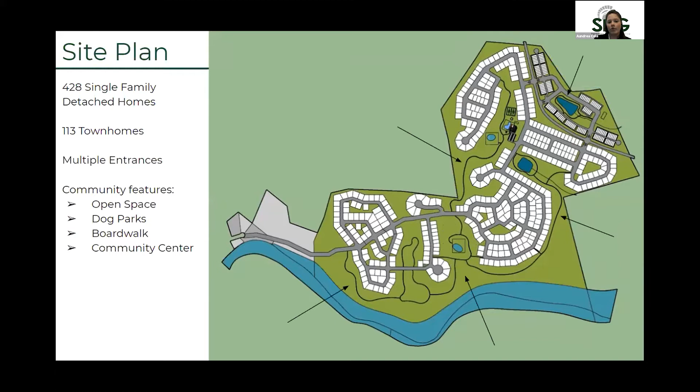Some community features of our design are open space, 3 dog parks, a boardwalk throughout the open space, as well as a centrally located community center.

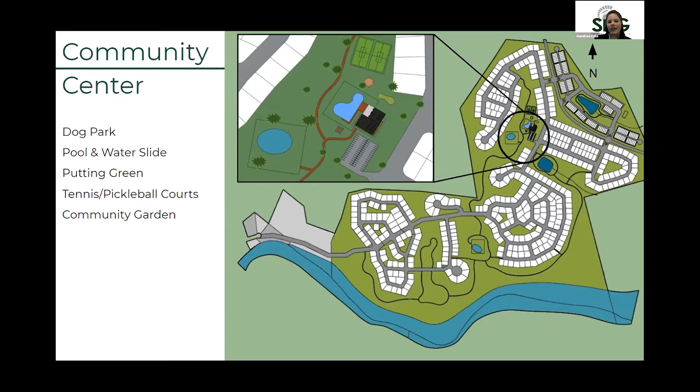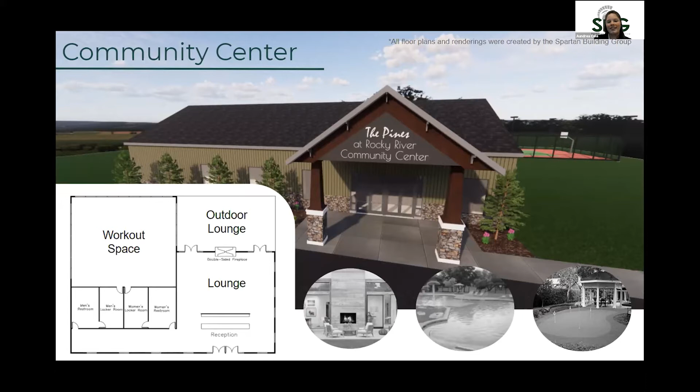This community center is going to have one of the dog parks nearby, a pool and water slide, putting green, tennis and pickleball courts, as well as a community garden, so there's something for everyone at the Pines at Rocky River. The community center is also going to have a workout space with men's and women's locker rooms, an outdoor and indoor lounge that's connected by a double-sided fireplace to create a cozy atmosphere that can be used year-round.

Our standard lot is going to be 80 feet wide by 100 feet deep. This allows for all of our floor plans to be set on most of our lots. It's important to note that there are 63 lots that are 60 feet wide, and this still allows for 5 out of 6 of our floor plans to rest on those locations.

Pink indicates any lot that has direct access to open space. Orange indicates any lot that's 9,000 square feet or greater, and yellow indicates any lot that has direct access to open space as well as a larger lot.

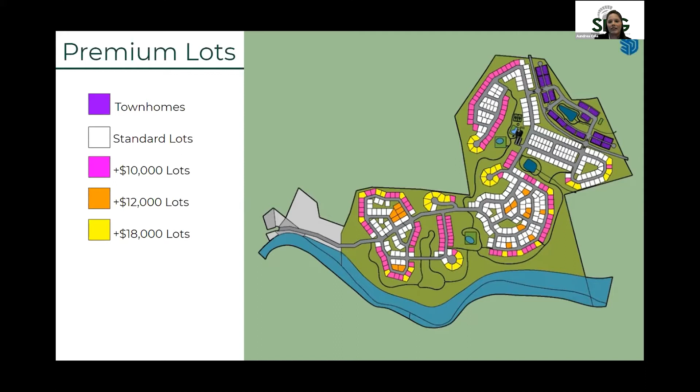Sustainability is very important to us at Spartan Building Group. We were able to achieve a 4-star National Green Building Standard rating for this site design, as well as an emerald rating for lot design. This was mostly due to following the natural topography of the site and creating a curvilinear road design.

Along the road network is our rain gardens, which is our main stormwater management system. These features, as well as the open space and a low impact option for our boardwalk, allowed us to create a beautiful and sustainable neighborhood for our residents.

Now I'd like to pass it on to Taylor for product design.

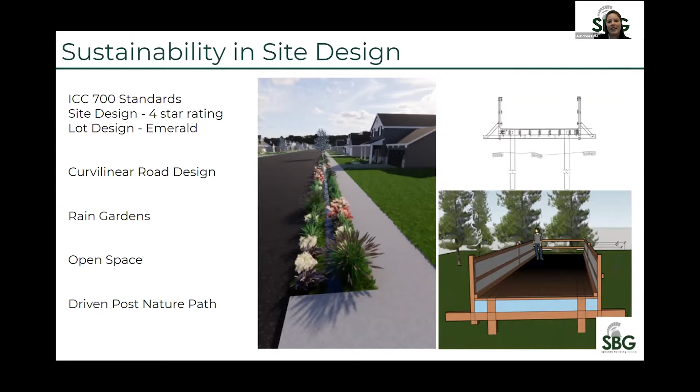Thanks, Andrea. Here at the Pines, we offer 6 unique single-family home plans and 4 townhome plans to choose from. All these models come in a craftsman-style exterior and are equipped with a 2-car garage, a covered porch, and a back patio. All our models are 0-step entry homes to allow for ADA accessibility and comfortable aging in place. The homes are customizable with our unique finished packages, and buyers have the option to choose from multiple upgrades.

First up, we have the Hickory. At approximately 1,300 square feet and a starting price of $264,000, Hickory is our most efficient model. The single-story home is an affordable option for first-time home buyers all the way to the active adults who are looking for less square footage to maintain.

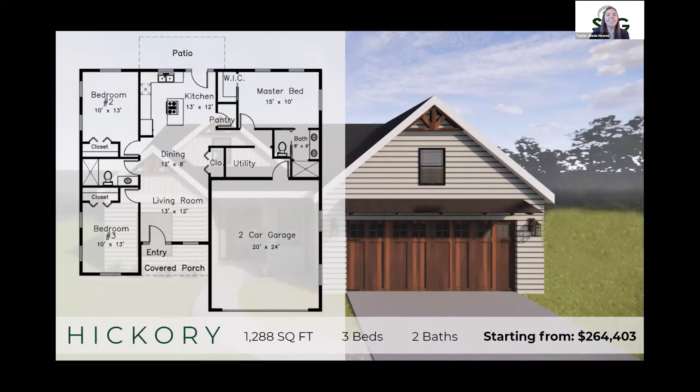Next up, we have the Cypress. At approximately 1,600 square feet and a starting price of $294,000, the Cypress is our most efficient 2-story model and offers a pocket office space, making it ideal for the young professionals who are moving to our area.

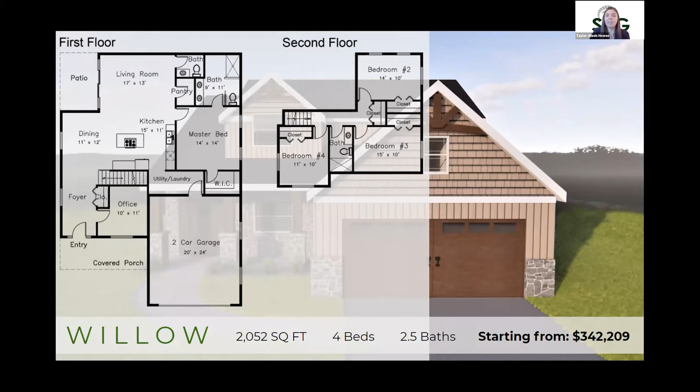Now showing is the Willow. At approximately 2,000 square feet and a starting price of $342,000, the Willow's additional square footage allows for a first-floor master suite and private office. This model is ideal for buyers who desire the large common spaces but appreciate the privacy as well.

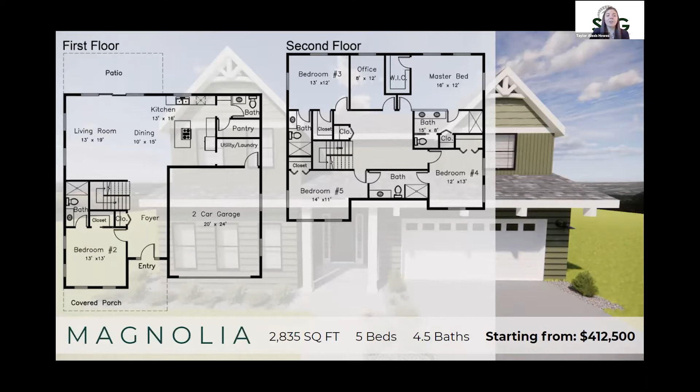Next up is the Magnolia. At approximately 2,800 square feet and a starting price of $412,000, the spacious common area and large number of bedrooms, coupled with the fact that the first floor bedroom can act as an in-law suite, make this model ideal for large families. And finally, we have our Dogwood.

At approximately 3,300 square feet and a starting price of $448,000, the Dogwood is our largest model, allowing features like additional flex space on the second level and a breakfast nook off the kitchen. The spacious bedrooms and first floor master suite allow this model to fit a multitude of lifestyles, from active adults to large families.

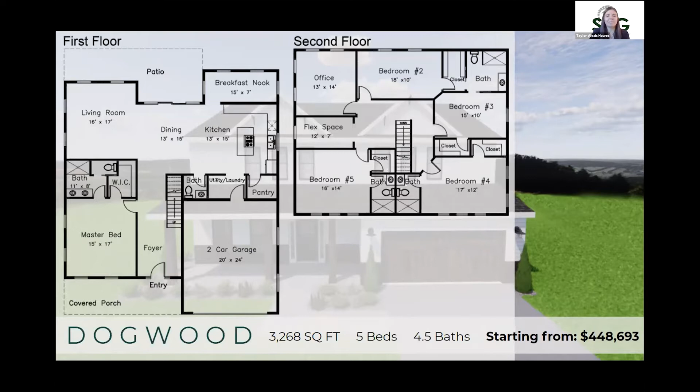Here at the Pines, we also offer 4 20-foot wide townhome plans, 2 of which are interior unit designs starting at $291,000 and 2 of which are end unit designs starting at $306,000. All these units are 3 stories tall and have 3 bedrooms, 2 full bathrooms, and 2 half baths, allowing for at least 1 bathroom per level.

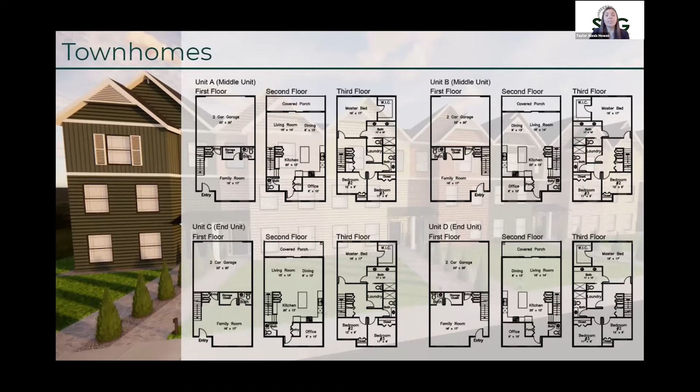Additionally, they're all equipped with a 2-car attached rear-loaded garage, a 2nd-story covered porch, and the upgrade option to include a shaftless elevator if the buyers desire. These are ideal for buyers who are looking for a low-maintenance home but don't want to compromise on size or style. Sustainability is also a very important part of product design here at the Pines.

All our models are equipped with low E windows, low VOC paints, and smart thermostats. Our standard appliances are all Energy Star rated, and all our fixtures are low flow.

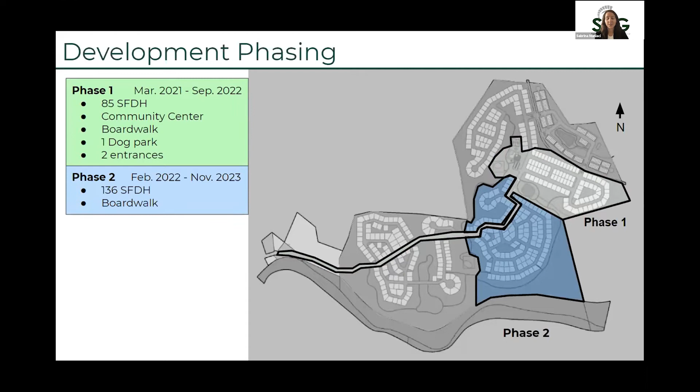We've structured our base schedule on breaking ground on 3 homes per week in accordance with our projected market. The first of 4 phases will incorporate 85 homes in the northeast, south of Zion Church Road, and the community center. Each phase will begin when its preceding phase is 65% complete, so phase 2 will start February 11th, 2022, and includes 136 homes in the middle of the site and along the Rocky River.

Phase 3 will start March 13th, 2023, and includes 122 homes in the westernmost area, as well as the entire 113-unit townhome area northeast of Zion. Finally, phase 4 will start June 11th, 2024, and finish out the remaining 85 homes in the northern area of our site. The entire project will finish in 4 years and 9 months, completing December 4th, 2025.

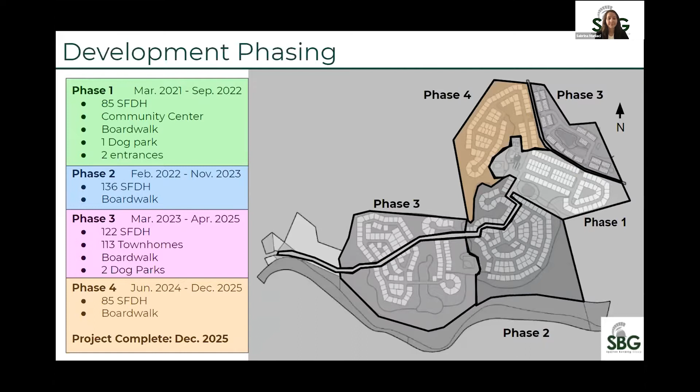Thanks, Sabrina. Our sales and marketing plan is broken up into 3 overarching phases. We begin with our introduction phase, which concentrates on local brand awareness. In this phase, our online exposure will include the launching of our website.

Additionally, there will be many print forms of advertising, such as billboards along local highways, to attract potential buyers identified through our market analysis. The last portion of this phase includes the opening of a sales office with the eventual hiring of an office manager and 4 real estate agents.

Next, we have our face-to-face phase. The purpose of this phase is to share our product with potential buyers. We've told them who we are, now we need to show them. This phase will include the hiring of an external marketing firm that will overtake the expansion of social media along with more traditional practices such as the parade of homes.

Finally, we have our boots on the ground phase. This phase is tasked with transitioning our development into a home for residents. One way of doing this will be by hosting a range of events for residents and locals.

These strategies are estimated to capture 46% of our active adult market and 80% between the ages of 18 to 50 years old. By diversifying both print and media channels, Spartan Building Group can effectively reach all 3 target markets.